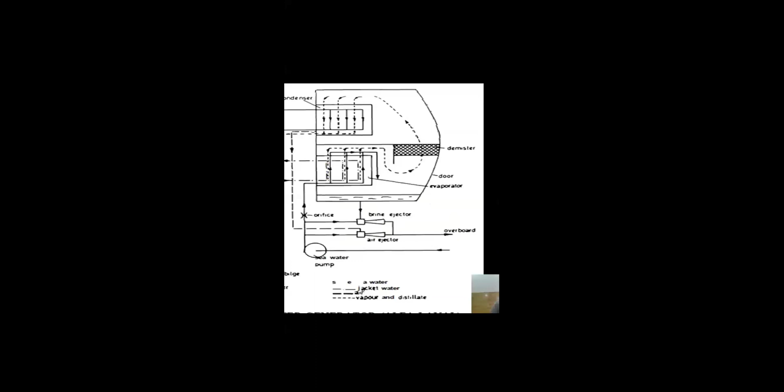So the boiling point drops. Normally your boiling temperature is 100 degrees. So why are we doing this? Because we are not getting 100-degree temperature at the outlet going to the freshwater generator - that is the outlet temperature from the jacket, which then cools down and goes back to the tank or circulation. So we are not getting the 100-degree temperature, and for that reason we have to reduce the boiling pressure. The boiling temperature of 100 degrees is reduced to around 80 degrees, or maybe 84 or 85 degrees.

What is the difference between an ejector and an eductor? An ejector pump is basically where we use equipment like ejectors, or an ejector could be anything which ejects - it doesn't matter if it's specifically called an ejector.

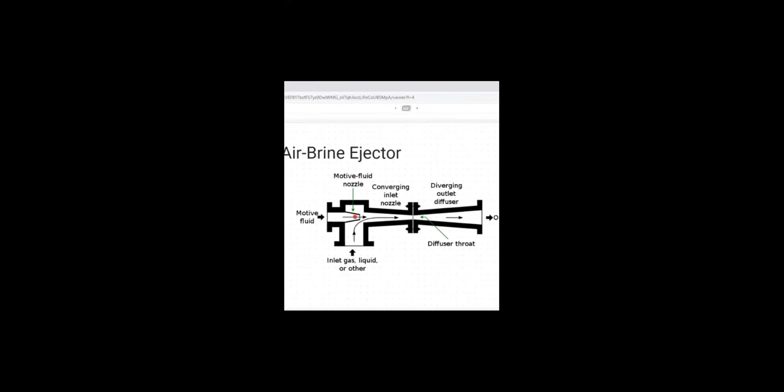No, actually, if you look at the eductor and ejector, there is a motive fluid. You see, this is the air brine ejector. Here there is a motive fluid. When this motive fluid passes through the cross-sectional area of this converging-diverging nozzle, there will be a pressure drop, because the cross-sectional area is reducing. There, suddenly, vacuum is created. So this vacuum, once created, passes to the outlet. So for the air and brine ejector, the motive fluid is actually your liquid.

Liquid means your water. If you look at this freshwater generator, how are we using it - on what liquid are we using the air ejector? Seawater. Correct. So basically, here the motive fluid is seawater. Yes, motive fluid is water. But in case of an ejector, the motive fluid will be different - that is the main basic principle. It will be steam or air, but here it is actually water. That is your eductor.

This is the basic principle, basic difference. Ejectors require motive fluid, which could be anything - not only seawater or water, but any fluid, especially steam or air, that can be done. But for the eductor, motive fluid will be water, either seawater or fresh water, any type.

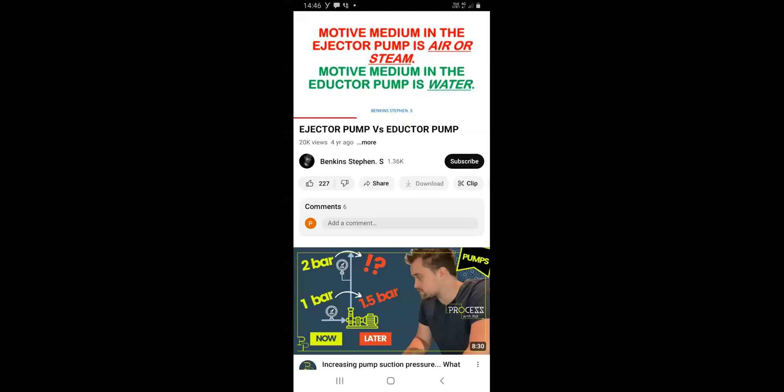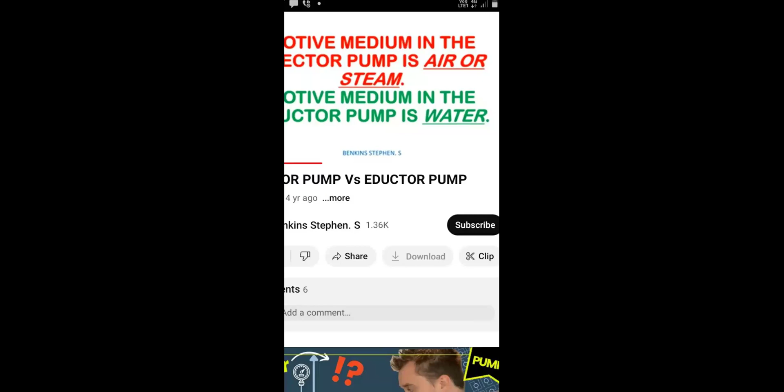Sir, we cannot take the screenshot of that. Just one, yeah, just one.

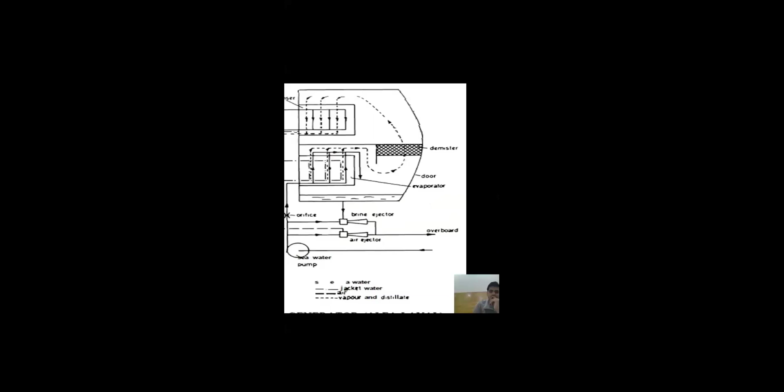See here, this is your ejector pump, no? So here the motive fluid will be given, this thing - you see from the seawater pump that is going overboard. So the ejector is your water, and the air is drawn from the chamber. You see this dotted line from the air ejector and the brine ejector.

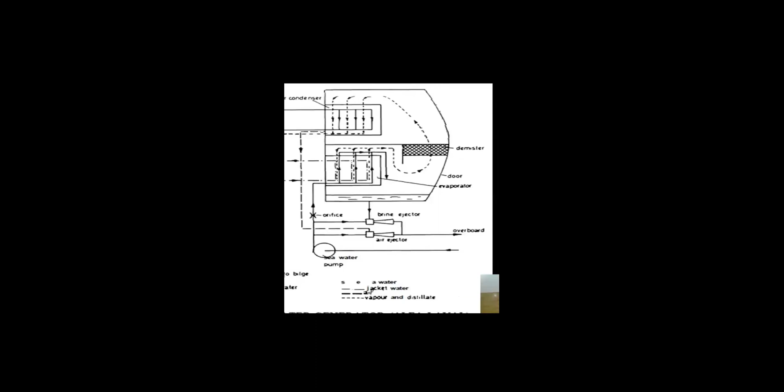No sir, the other slide you showed, no? Yeah, another slide I will show. This one, no? No, no sir, there it is written difference between ejector and eductor. Yes sir, just unzoom it so we can see completely. Okay sir, thank you, done.

Really, here it is a little bit different. Yes sir, it's written different, so don't copy this one. There is something different, I will send it. It's written opposite - yes, here it is written opposite.

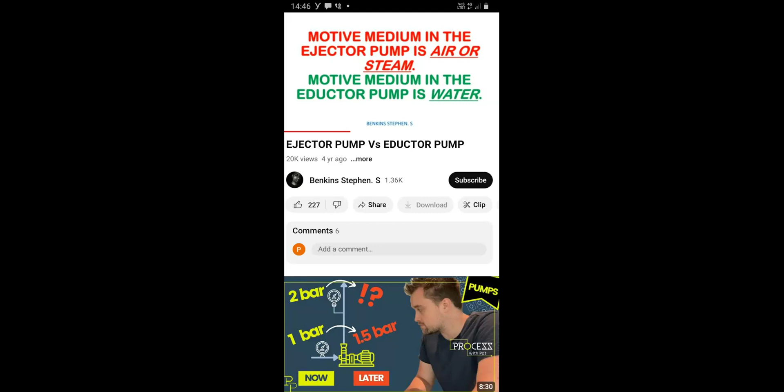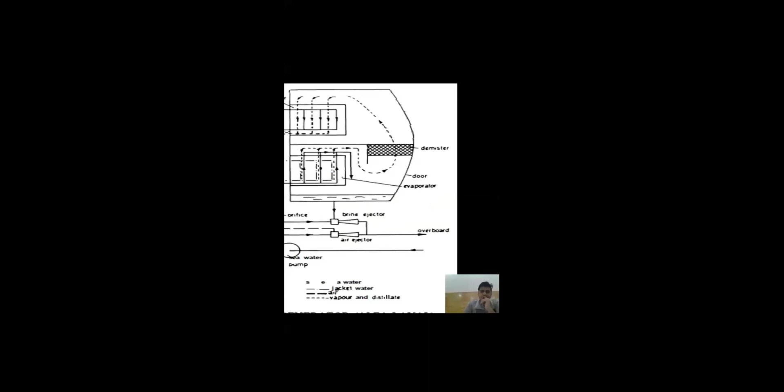Actually, from this page, from your freshwater generator, the air ejector's motive fluid is taken from water to liquid, so liquid is your motive fluid. In case of the eductor, suppose if you can see the sewage discharge of the sewage tank, there we are using the fire and GS pump to throw out that sewage, meaning you make that sewage tank empty.

But sir, still I have a doubt. We mostly say air ejector for turbines or our condenser, vacuum condenser - yes, it's an air ejector. And where is the ejector? The motive fluid is steam, yes, but we call it ejector. There should be ejector.

Actually for the steam driven pump, whatever your steam line is, that ejector, what we will call that, yes, motive fluid is your gas actually, that is steam. Correct, steam, so yes, it should be called ejector then.

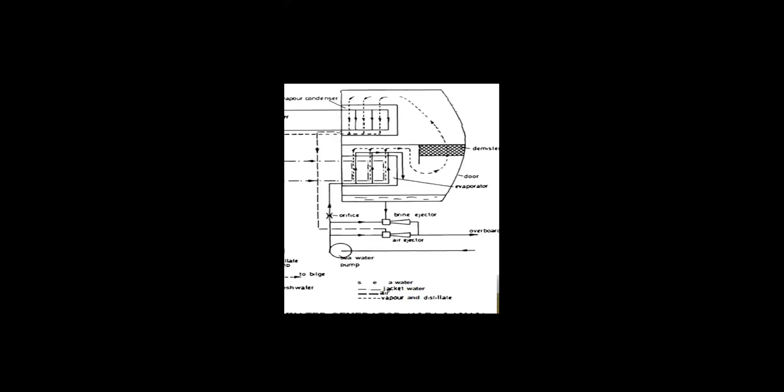No, and that is, this thing is actually your ejection there. Suppose for your ejector pump, that ejector pump is creating the vacuum. So the vacuum, how it is created, actually that is created by your ejector, is venturi, that is the ejector, by using the ejector. But you are saying motive fluid of the ejector is air or steam. Yeah, no, that is for the ejector, you are right, that is for the ejector.

For that, actually this is the ejection. The ejector is here, we are using the ejector, that eductor's motive fluid is water, correct, that is the water is your ejector. Here, whatever we are using the ejector part, that is we are using the motive fluid is your water actually. So that slide was right. Yes, exactly, you are telling correct. Motive fluid is mistake I have, okay.

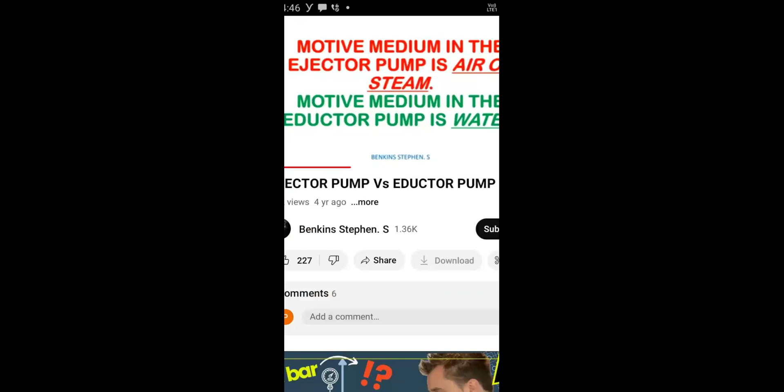Because mostly I do remember we call it air ejector, and where the motive fluid is steam, so yes, should be exactly ejector, correct. And actually there is your air, this eductor is there, means freshwater generator, that is actually your eductor. The pump is ejector, but the mechanism of the process is called ejector, eductor. Yes, we usually call it ejector pump, but the equipment which is called, we usually call it ejector, eductor, right, yes correct. No, I got it, got it, right, exactly.

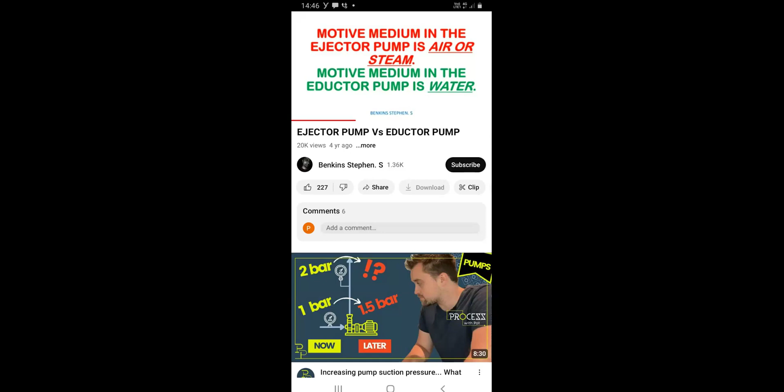Oh, okay, this one. Okay sir, fine. I have also corrected in my note. Yeah.

Okay, now one thing is for the freshwater generator, mostly what are the processes I want to discuss, that is all. But still, one time, how the whole process is going on. Shall I try, or Kaushik want to try? Kaushik, you can tell. Just describe the full process, how this complete process is going on.

Okay sir, so in freshwater generator, we first discussed that by creating the vacuum, we are lowering the boiling temperature of water. So here we are using jacket temperature as a heating medium, jacket water, and sea water we use for producing the fresh water.

Yes, where seawater passes through the evaporator chamber, and it is evaporated and passes through the demister and goes to the condensation chamber. Okay, and one more thing sir, this seawater is used as a cooling medium from the condensation chamber, and feed of the evaporator chamber which we tap from the outlet of the condensation chamber pipe and give feed to the evaporator chamber seawater feed line.

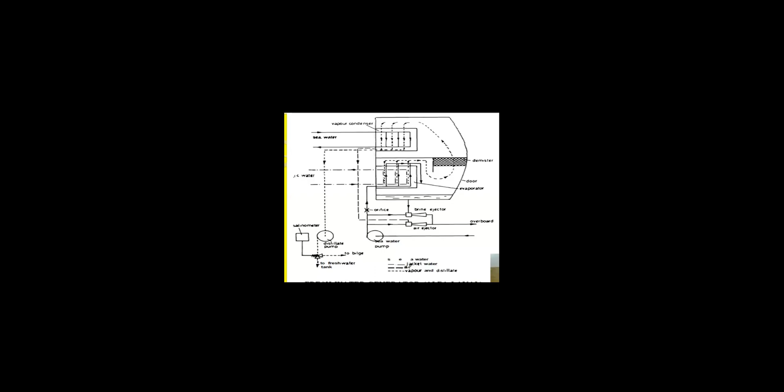And if they still ask what is your quantity limit, and then ask why you are giving the dosing - sir, actually the chemical we are using has anti-scaling and anti-foaming capabilities, just to prevent the evaporator from scaling and fast scale formation, we use anti-foaming and anti-scaling chemical.

Basically, scale formation in the freshwater generator can be controlled and minimized by continuous chemical treatment.

Now, one thing - on what principle does this ejector actually work? This is sometimes asked as a small question. Bernoulli's theorem, sir. Yeah, Bernoulli's theorem. How does this Bernoulli's theorem work?

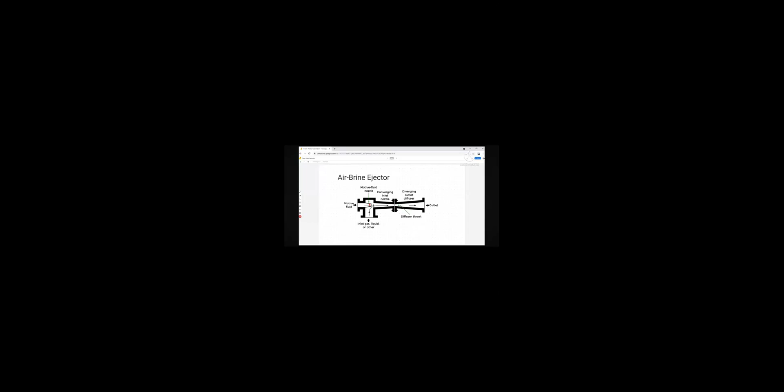Whenever the motive fluid passes through the divergent and convergent shapes of the nozzle, it creates a vacuum at the perpendicular direction of the nozzle. Because of the change in velocity and volume, a vacuum is created at the perpendicular direction of this nozzle. But why is the velocity changing? There is a change in velocity because of the convergent and divergent diffusers.

Yes, it's actually the construction of the diffuser - you see this, there is a diffuser, the construction of the nozzle. The cross-sectional area of the convergent nozzle or divergent nozzle is different. The inlet of the nozzle at the converging part is towards the center, but at the throat, the cross-sectional area slowly decreases. And at the divergent or outlet of the diffuser, it slowly increases.

So for that reason, there is a difference in velocities. The velocity drops and then a vacuum is created inside. To fulfill that vacuum, the air or liquid or other liquid comes in.

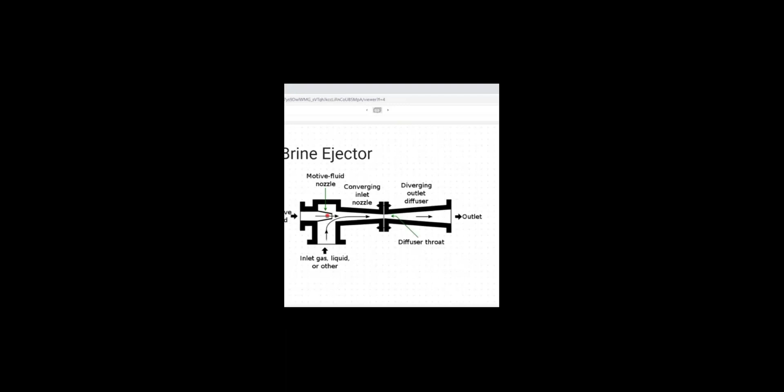Now the troubleshooting - what are the problems that can happen in your freshwater generator? A lot of problems, sir. Less production, low vacuum, improper condenser heating, cooling, loss of distillate pump suction, vacuum drop.

I mean, vacuum is not getting created. This nozzle ejector is choked. Yes, or the feed water supply is not proper. The nozzle is choked, the orifice is choked. Yes, orifice is choked.

There is a production issue - suppose there is one question that is sometimes asked. Their freshwater generator has a 30 ton capacity, but it is producing only 15 or 16 tons. The 30 ton freshwater generator is producing only 15 or 16 tons. So what could be the reasons?

Improper vacuum, improper feed supply, so scaling. After scaling, okay, so if there is scaling, first of all you go this way.

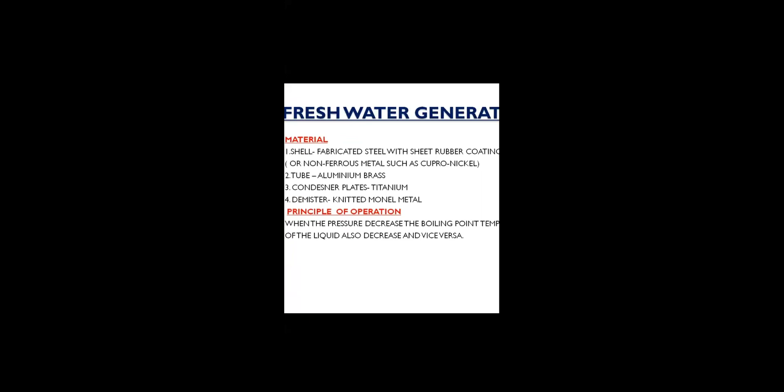It is your knitted monel. Condenser plate is your titanium. Tubes are your aluminum brass. Shell is your fabricated steel with sheet rubber coating. Non-ferrous metals such as cupro-nickel.

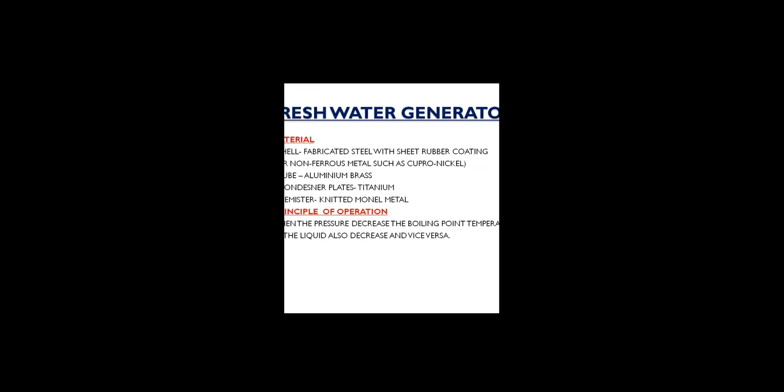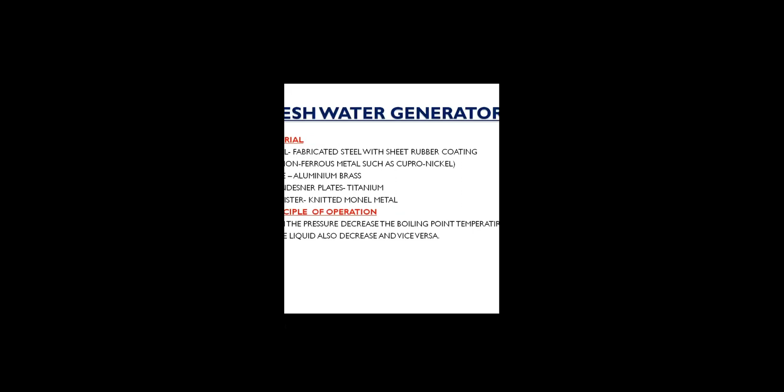Sir, can you reduce the size? Okay, sir, thank you.

Then another part - suppose your freshwater generator salinity is high. What are the reasons for your salinity being high, and what will be your action?

Reduce the feed. To reduce the scaling also, check your inlet outlet temperature of the jacket, and check the supply of seawater also in the condensers. Check for the vacuum - if vacuum is high, salinity will be high.

Salinity will be affected, vacuum also is one point, correct. Then you are giving more feed, that is also one point. Then if your heating inlet temperature drops, suppose instead of the set value it drops to 70 degree or 65 degree, the heating inlet temperature can also be dropped.

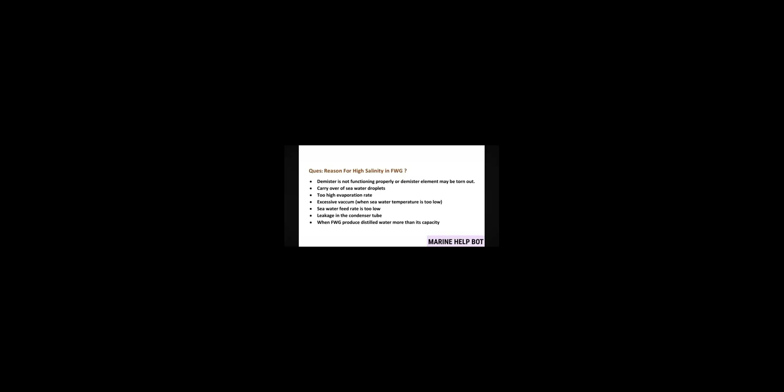Normally from the freshwater generator, they will ask questions like: the capacity of the freshwater generator is reduced, what is your action or what could be the reasons? Or your salinity is high, what will be your action? Your vacuum has dropped, what will be your action? And mostly, what principle does the freshwater generator work on, or what is the difference between an ejector and an injector? These are the 4-5 things they will typically ask.

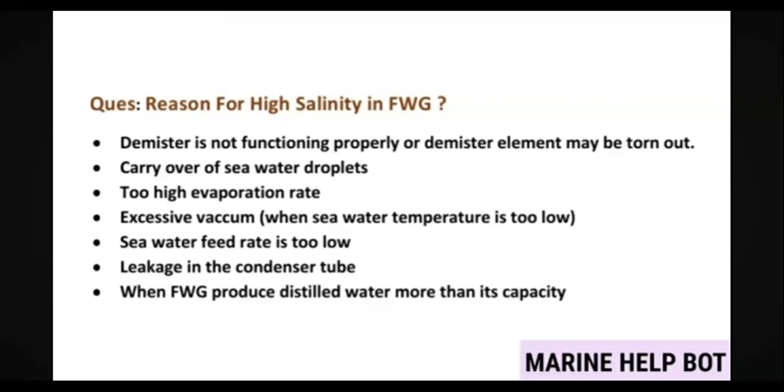Okay, so up to this is fine for freshwater generator? Yes sir, yes sir. Okay.

Okay, have any of you worked on an RO plant? This is a small thing - what is the difference between reverse osmosis and osmosis?

Just give the brief idea, so I can continue tomorrow. Osmosis is a procedure where we separate two liquids through a membrane, one of higher density and one of lower density. In normal osmosis, the lower density liquid has a tendency to flow towards the higher density liquid through the membrane. This procedure is called osmosis.

In reverse osmosis, what we are doing is flowing liquid from the higher density side to the lower density side through the membrane by applying external pressure or a pump. Correct, exactly.

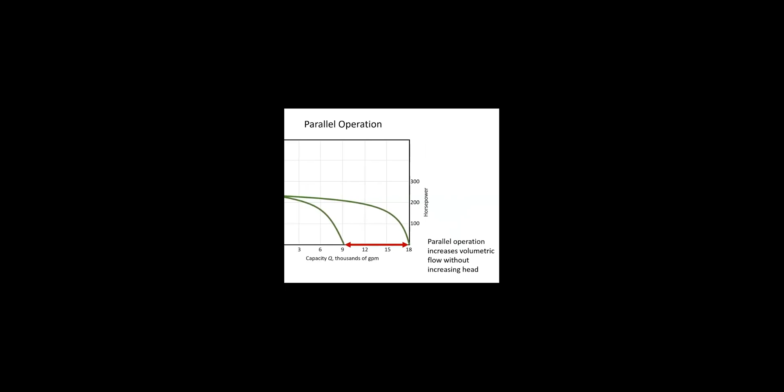This is basically used when you need much more volume or capacity from the pump, where you need a high flow of discharge. That time you need this pump capacity, meaning this type of parallel pump. If you are putting the impeller in parallel, then you can use this pump.

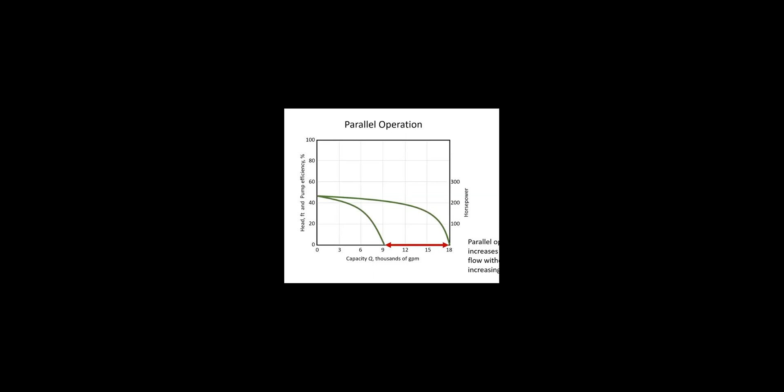You see, the impeller - sometimes you see two-stage impeller, two impellers given into the same pump shaft centrifugal pump. Two impellers given, so that means you give more volume or more discharge in case of parallel operation. We don't need the head actually.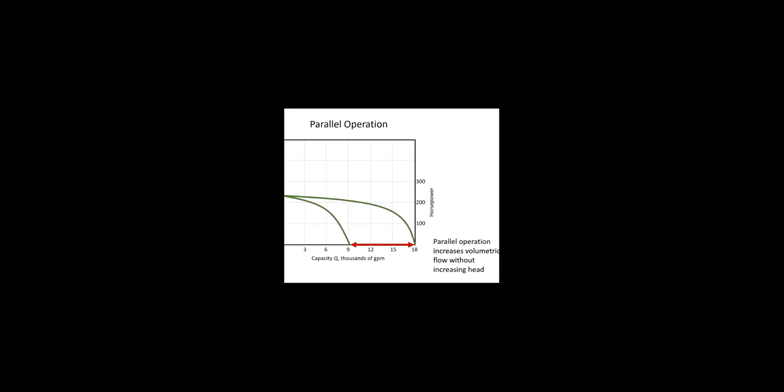Understood? Yes sir, two impellers. Otherwise sir, we go for the multi-stage pump.

Yes. One more thing, for seawater supplying to LT cooler, sometimes we start two seawater pumps in parallel condition. And in series condition we have the fuel supplying booster pump and supply pump, that is connected in series. So that time where we need pressure, we use the series.

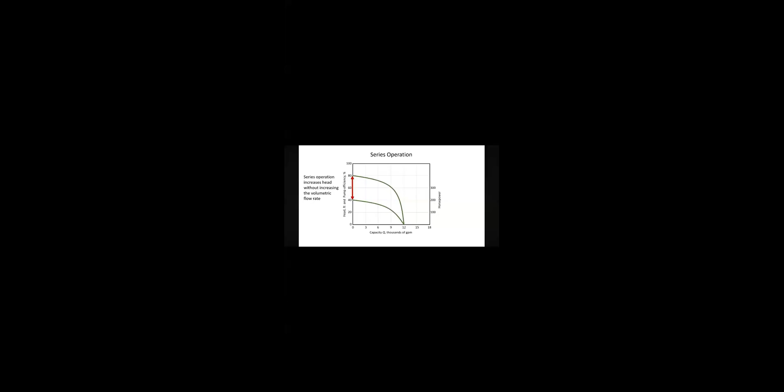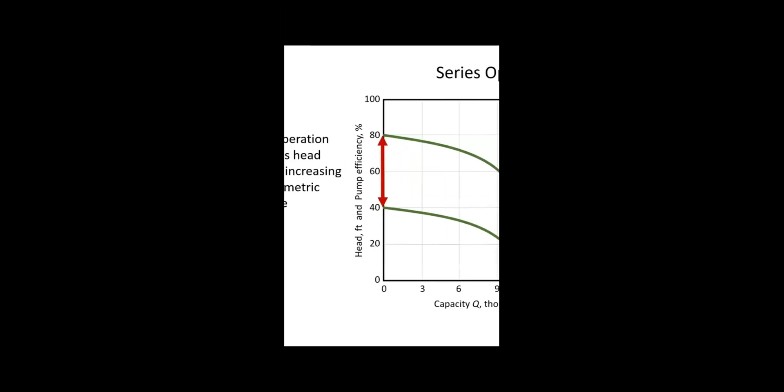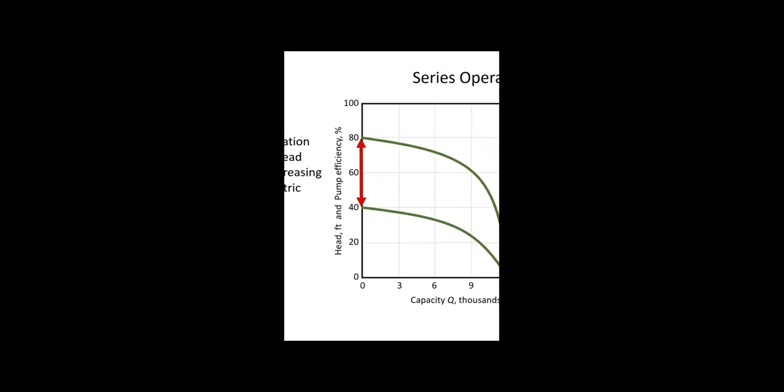If they want to ask, you can give the reference of this graphical representation. In case of parallel operation, where you need the capacity, or in series condition this increases the head without increasing the volumetric flow rate. So this is the basic thing - where you need pressure you can use series, or multi-stage, or where you need your volumetric discharge, there you can use parallel. That is the basic difference between the two.

Okay. Okay sir, dear.

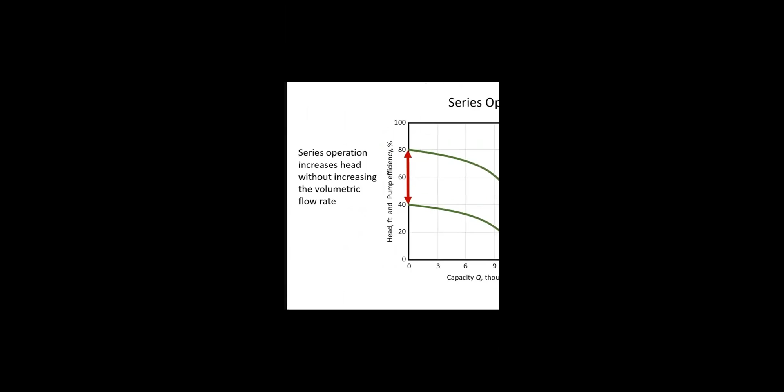Okay, so for today it's okay. Tomorrow I will complete this thing - your RO plant, plate type heat exchanger or tube type heat exchanger, and valves.

Tomorrow is Friday, na? Tomorrow is Friday... no, Saturday tomorrow. What day is tomorrow? Tomorrow is Saturday, na?

Saturday sir. Saturday, okay. So tomorrow I will complete this topic, and we'll discuss whatever remaining questions they will ask, because for freshwater generator, there is this much question they will ask. You can see the question - this is the maximum type of question they will ask you on freshwater generator.

And okay, pumps is completed, so freshwater generator completed. So up to this, any doubts or anything, any questions regarding the freshwater generator?

Not regarding the freshwater generator, but still I have doubt regarding swash plate pump, radial flow, and axial flow. Swash plate or variable delivery - okay, axial flow type and radial flow type, na? Okay, so first of all, what is the variable delivery pump and what is the fixed flow control pump or fixed flow type pump?

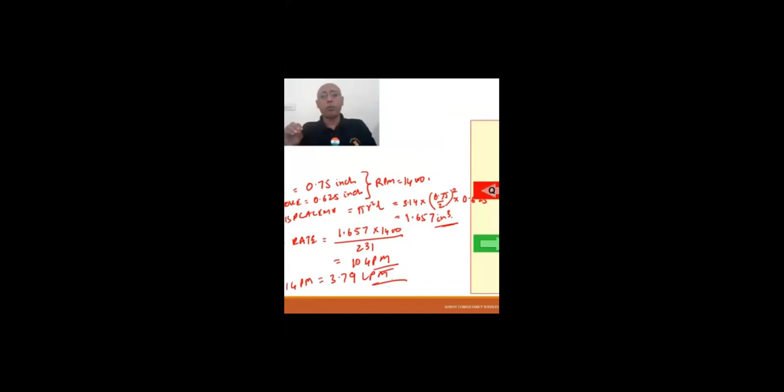Here the discharge rate or discharge capacity we can vary. Now how we can vary the discharge capacity? As you shown yesterday, we can have an eccentric pump or the eccentric shaft type pump. Actually, by varying the displacement, we vary the displacement or output of the pump, the delivery of the pump. The displacement formula is pi r square L.

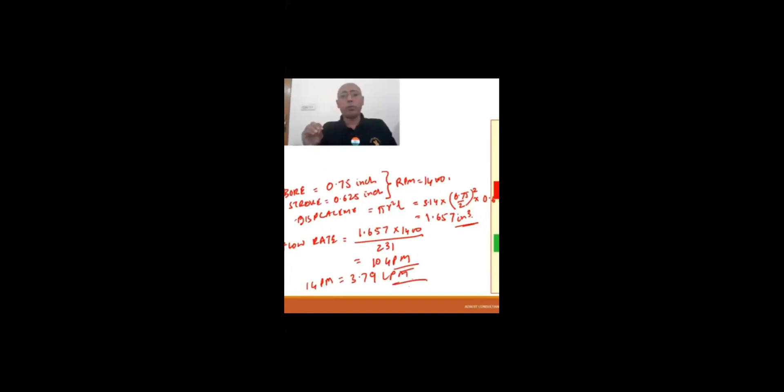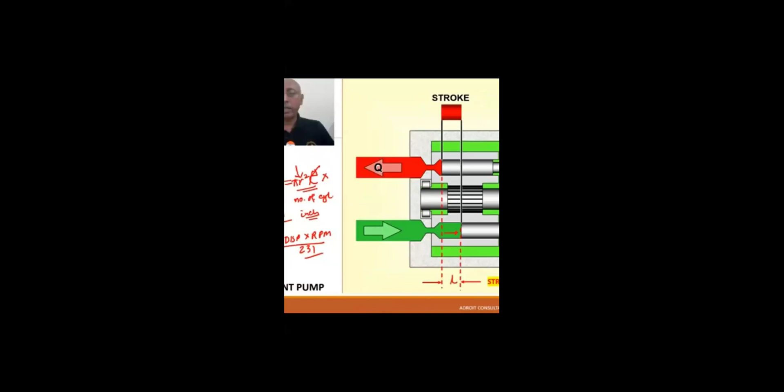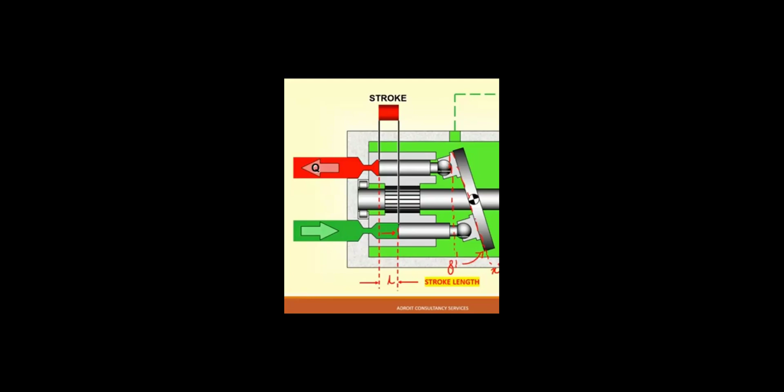This is 0 degree to x degree. So by varying the angle from 0 degree to x degree, this length L will vary - how much the piston can push inside the cylinder, or how much it can come out, how much it can get in or out. So the stroke length will vary by changing the angle of your swash plate. When this varies, displacement will vary, and the flow rate of the pump will vary.

Flow rate is equal to displacement into RPM divided by 231. That is the way displacement or delivery can be varied.

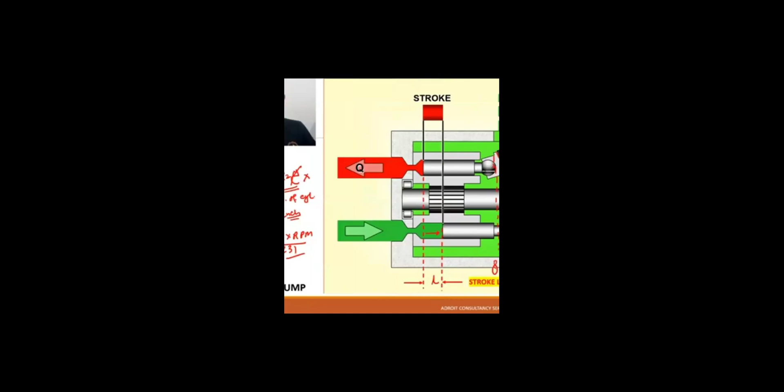But for the case of your fixed flow pump, either gear pump or screw pump, any such pump, the flow is not varied due to angle deviation, because once this swash plate comes to 0 degree, there will be no discharge.

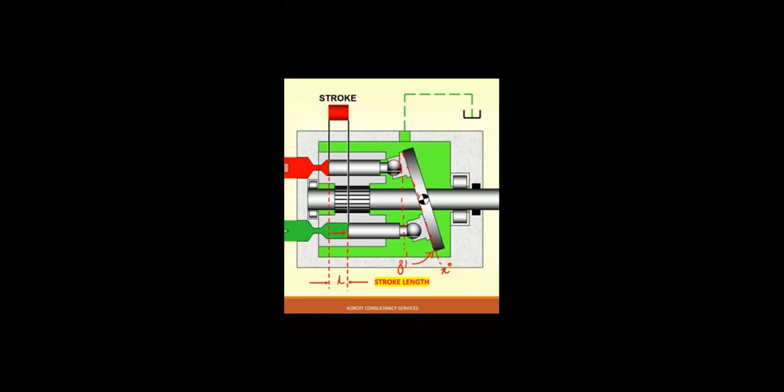You can understand up to this, clear? Clear up to this?

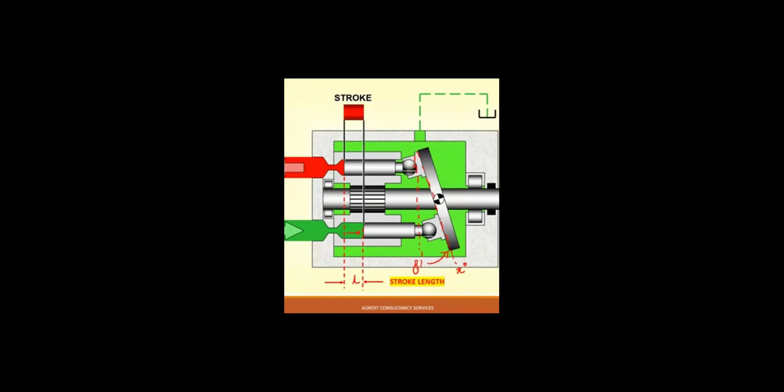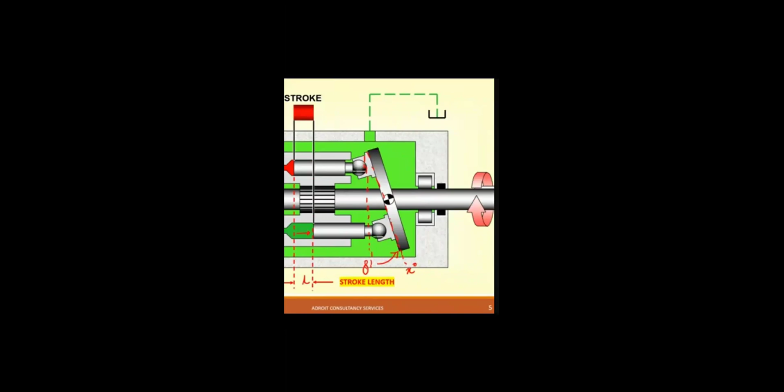So now the construction of your swash plate pump - the swash plate here, this side is showing the X. This X line is drawn as the axis of this plate. This is actually your swash plate. Now I will show another diagram.

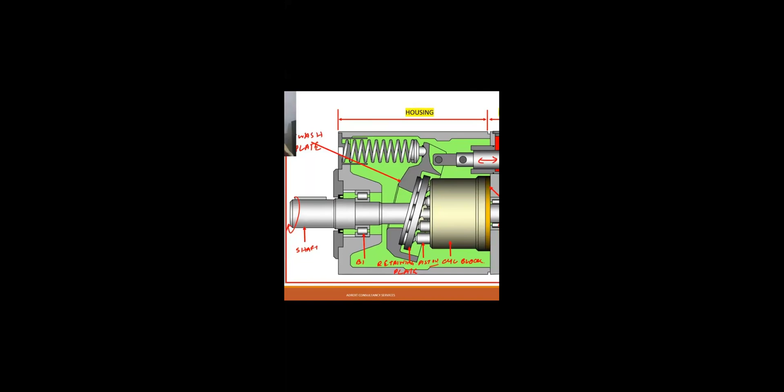You see here, it is the swash plate, shown like this. Is it visible? Yes. So here it is showing the swash plate.

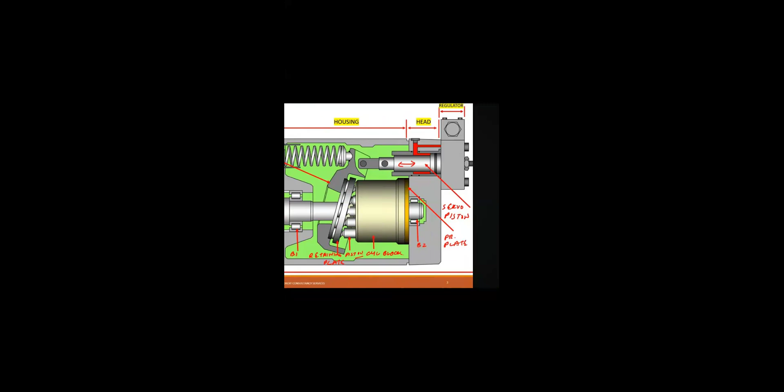Now this plate, this angle, it will be moving by your servo piston. This is also connected with your regulator. So when the angle of this plate changes, the displacement will change. Up to this you understand?

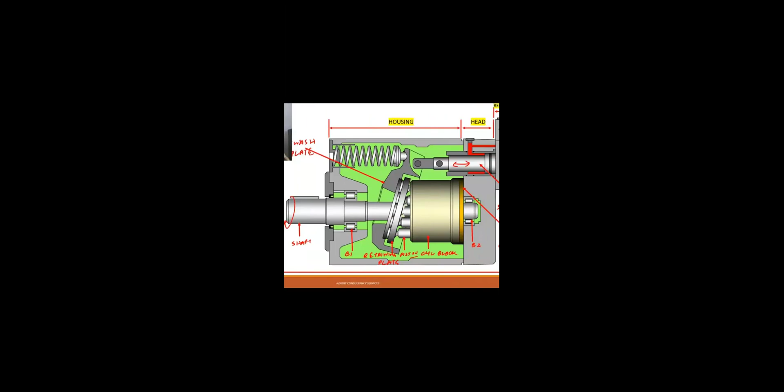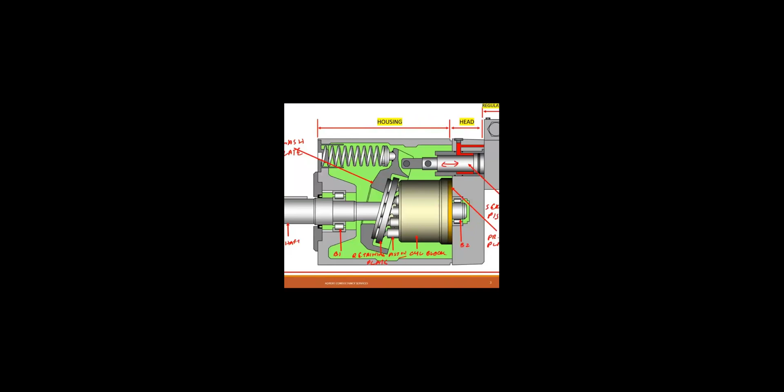So the construction of the pump is such that here is your swash plate, there is a retaining plate, the piston inside, there is a cylinder block, this is your bearing B2, there is a pressure plate, this is your servo piston, the top one is your head, and the complete housing, this is your regulator. Up to this clear?

Now I will go to another part. So now this plate is getting operated, meaning we are displacing it into different angles. How, initially, when the pump is not running?

Actually, initially when the pump is not running, practically or theoretically we are saying there is no discharge - the plate is in the straight condition. We say there is no discharge, but actually there will be discharge. There will be minimum discharge, because that plate has lubrication also, so minimum lubrication will be done - there is minimum hydraulic oil action.

So the minimum discharge is required for lubrication of the moving parts of the pump, like your swash plate, the bearing, the piston. So whenever it is at the zero portion, meaning zero angle, there will also be minimum discharge. Theoretically we say at zero degree there is no discharge, but practically minimum discharge happens there.

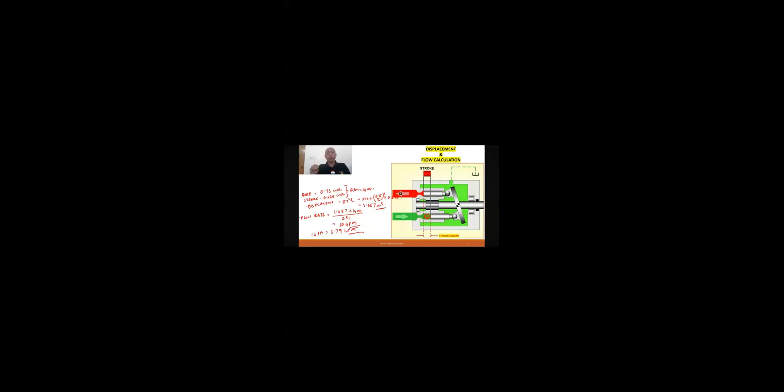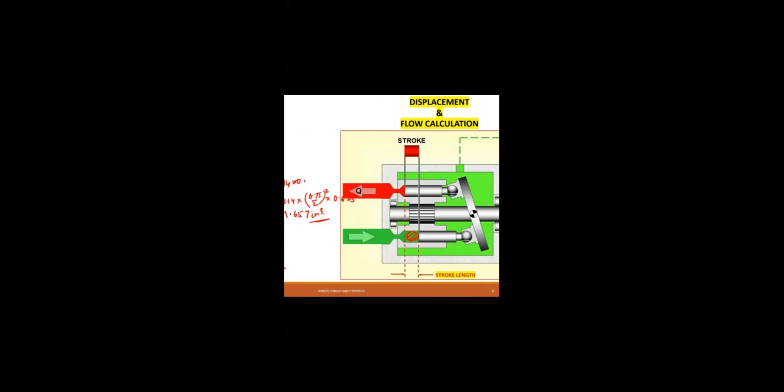This is another diagram - this is the same thing. This is your inlet, the green portion is the inlet and the red one is the discharge. Because when the piston is going inside the cylinder...

So when the piston is going inside your cylinder, the volume at this place, because the stroke length will be increased. Yes, so that I understood - the stroke length is changed, so the volume of oil which is coming inside the piston changes.

Okay, this is the operation for the disc. It's not the suction or discharge of the pump. It is the operation of the disc only.

Is this the operation for the disc, or is this the pump suction or discharge, red and green? No, this is the pump suction and discharge actually, because discharge, yes, pump suction or discharge.

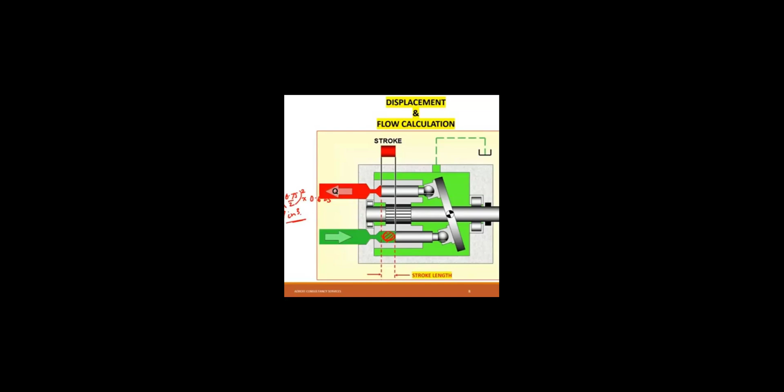Once this piston, how is this disc operating? This disc is operated by this part. There is actually this part here. This disc is operated by your regulator.

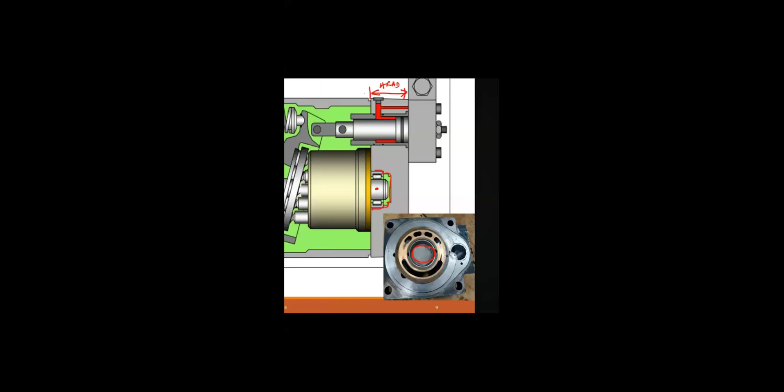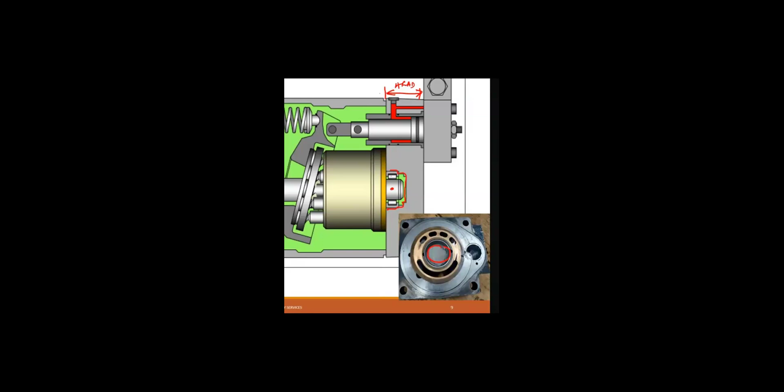Yes, this diagram I want to see. From here, the hydraulic oil will go inside this. There actually, this head, if you can see, there will be another hydraulic oil which is pushing the servo cylinder. So when this servo cylinder got pushed by the hydraulic oil, it will push this mechanical plate which is connected with the spring.

You see, this swash plate is connected - I thought this green part is not connected. Actually, this green part is the intact part of this disc, this arm. It is connected with this part. So when confused about this part, green color.

When the head piston gets activated, it will rotate. It will shift the arm, and because of this arm, the movement of this disc will take place. So it's correct.

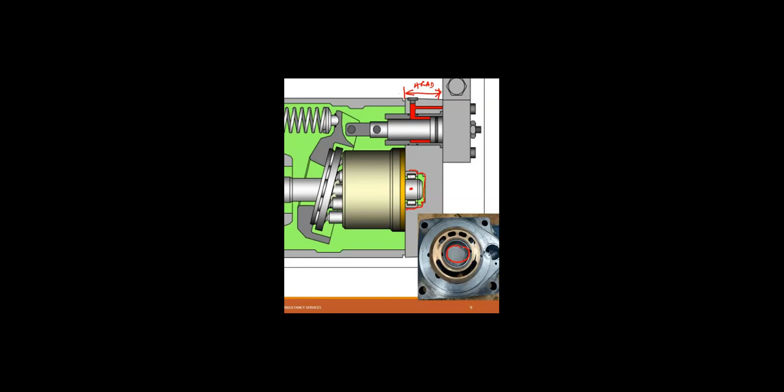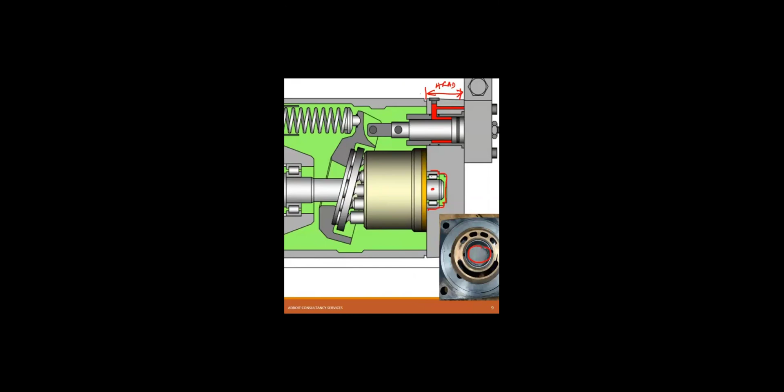So from an outside source the oil is coming here. Yes, from the outside source the oil will come - pump discharge. This oil is coming to the head mechanism, and from where we are activating this position.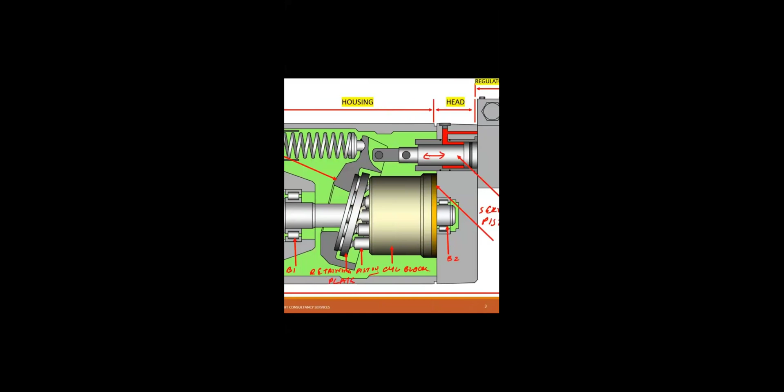Exactly. And actually your discharge, there is a pressure plate. You see this diagram - there is one pressure plate that you can see. There is a bearing.

Sir, one thing I want to ask you - in the Framo operation, in the cargo control room, we are using this lever, we are increasing or decreasing, and that will connect to the potentiometer, and that potentiometer is actually working for this servo cylinder. This is my question.

See, actually this potentiometer is working. Actually you have the manual circuit there. Actually you can even see the circuit, then only it is understood.

Actually, I don't have what you are talking about, the CCR handle, the RPM, but you are increasing and decreasing the Framo pump speed. Actually, it should basically connect with the potentiometer and it should work.

Sir, there will be two things there. One is the system pressure set knob, pressure 200, 150, and another is this lever for the particular cargo pump. Okay, sorry, that is for the cargo pump, and that system pressure I'm talking about.

One is your system pressure, correct? One is system pressure - one pressure is a normal pressure, that is your circulating pressure. Another is your system pressure, which is maybe 170 or 180. When one Framo pump is running, then it is 150 idle pressure. If it is increased more than that, 190.

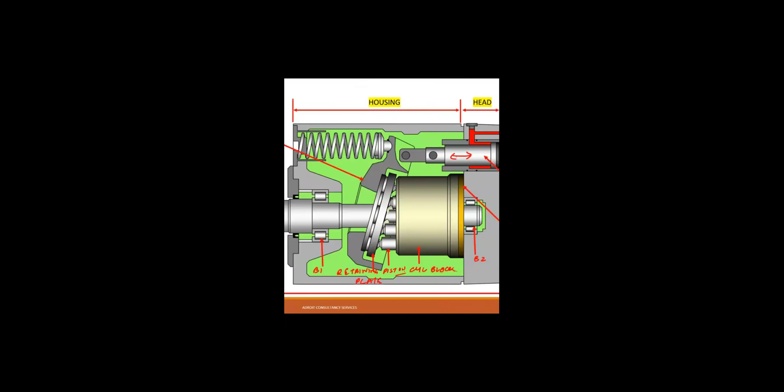Sir, can you show the complete figure? Because I want to know, so where is the oil discharge now? Actually, this is the complete figure - this hydraulic figure, maximum to maximum I can show you this thing.

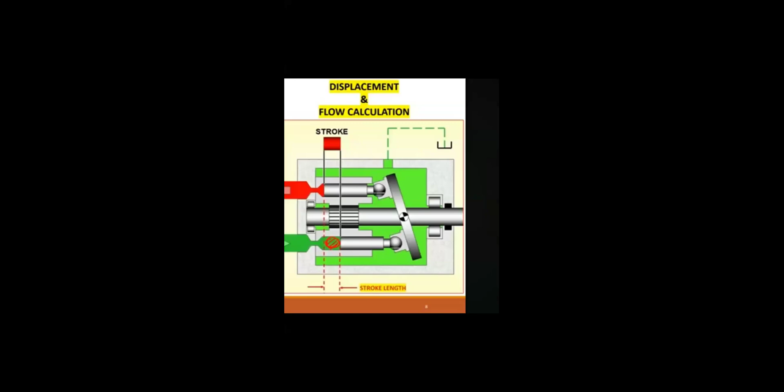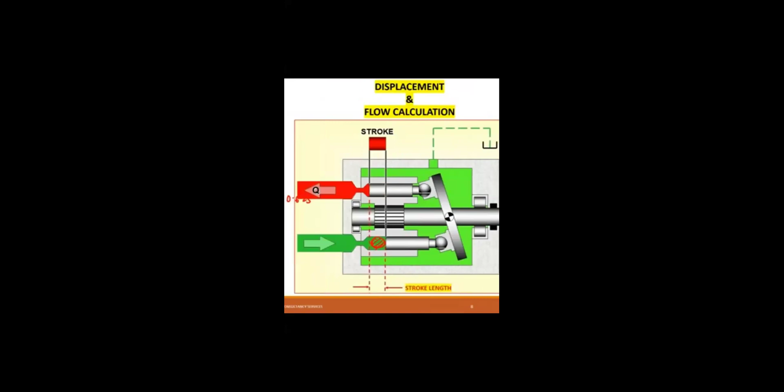Okay, from the last slide, no problem. Last, first figure is this, for pump suction discharge. Another figure was for pump suction and discharge, right? Yes, exactly. Actually, I'll show you another thing here.

There is a normal pressure plate there. So this pressure plate, there will be suction and discharge there. Just suction, and discharge will take place inside the cylinder only, right? Cylinder block - yes, inside cylinder block there is a pressure plate, so through that pressure plate it will going.

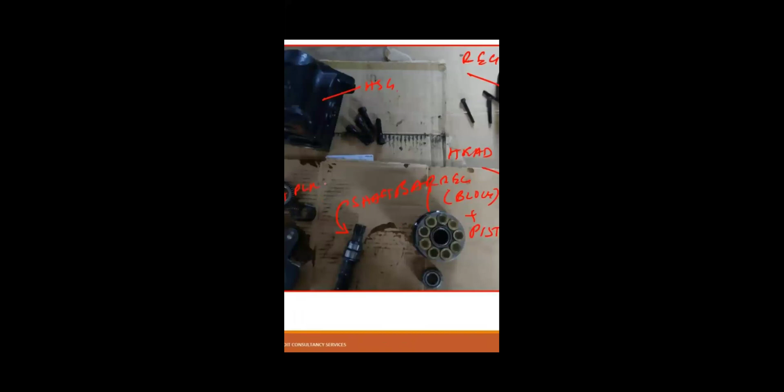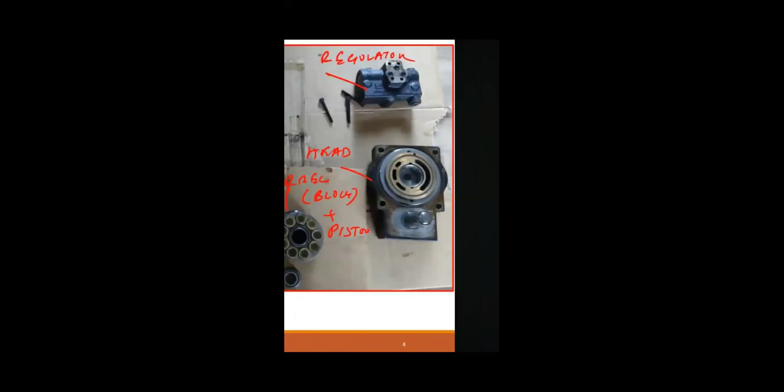I don't have this much complete detail. See, this is your swash plate, this is your casing, this is your regulator, and this is your shaft, shaft block. This is the piston, this your head. Actually this is the place - there is one circular portion in the head. This is your actually pressure plate, this side.

In the head, there is one circular portion. Inside that circular portion there is a small one - that is a big hole. Can you see this hole? Yes, yes, yes, this is actually your suction part. This arrangement is on the side.

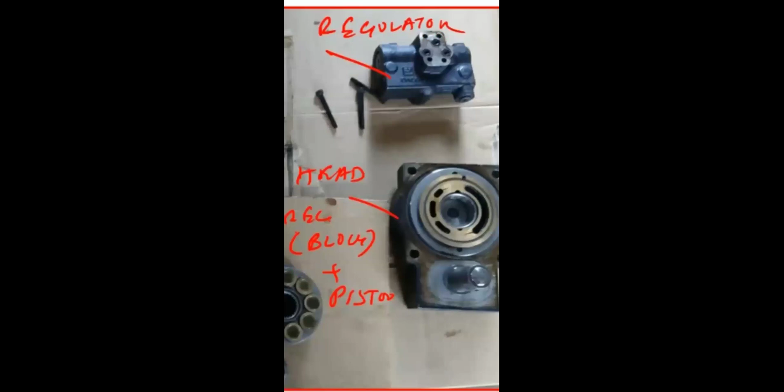I have seen it with the piston. And on the opposite side, there's three portion, there is three small holes - that is your discharge part. This is the cylinder block, inside. This is the head actually, and this will go inside.

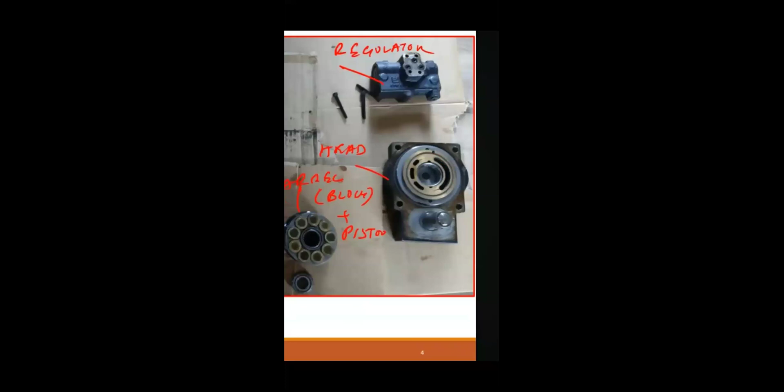This is the piston assembly, and it will go now, see this. This is your, you have this - these are pistons, your shaft. This is your block plus piston, blocked. So this one is connected with your head. You see this diagram now - this is your cylinder block where your piston is connected.

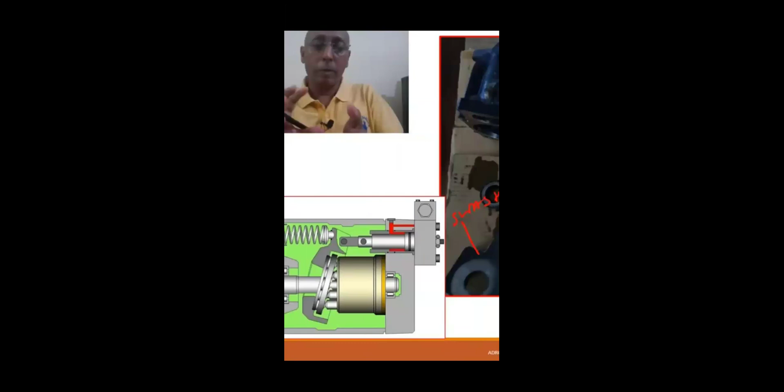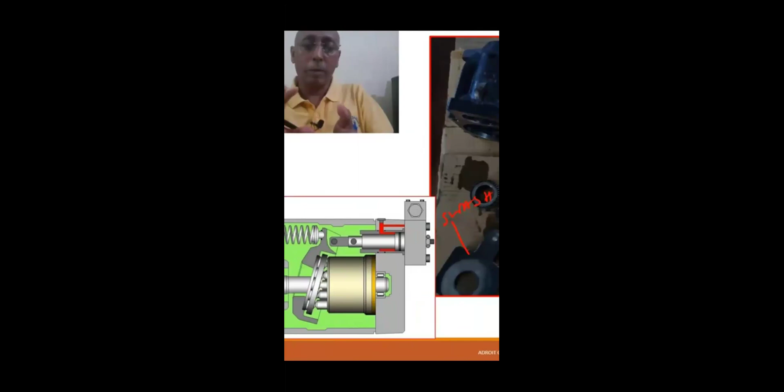And this is your swash plate this side. This swash plate is the swash plate. Swash plate. And this regulator is shown in this diagram picture - this is your regulator, this top part actually, and there is the servo piston.

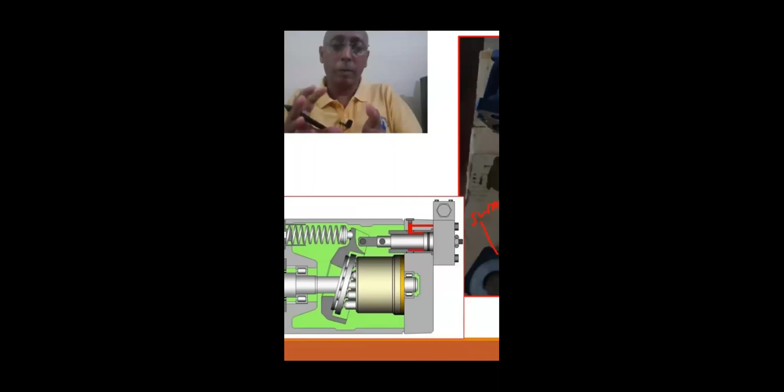Yes, I got it sir. Got it? So actually this swash plate has the discharge on this side actually - that's what the diagram is showing. So through the pressure plate there will be delivery, meaning discharge and suction will be there.

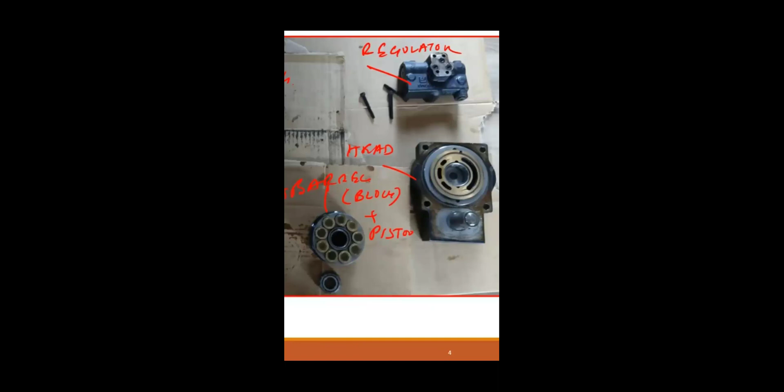So okay, now it's clear, no? Okay.